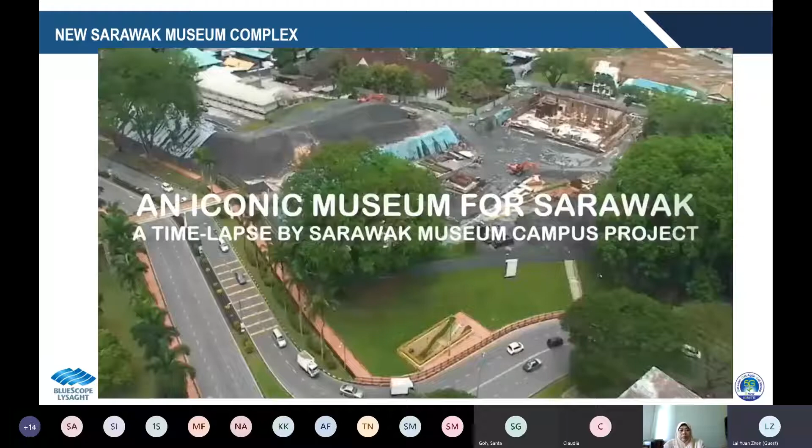Who actually allows them to film the entire construction process from the rooftop. So let's enjoy.

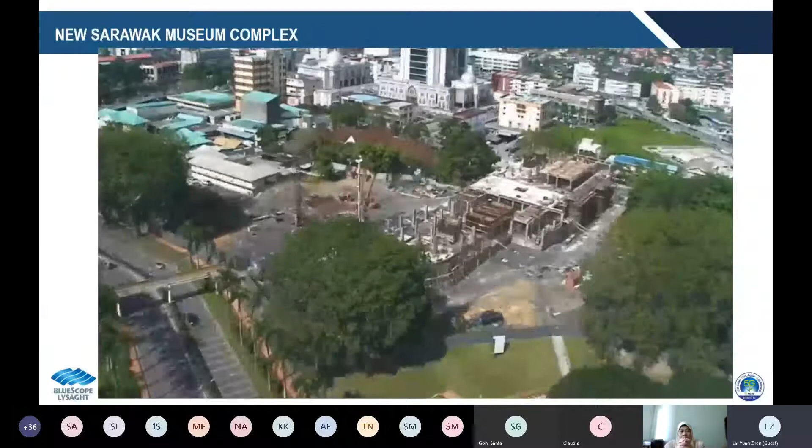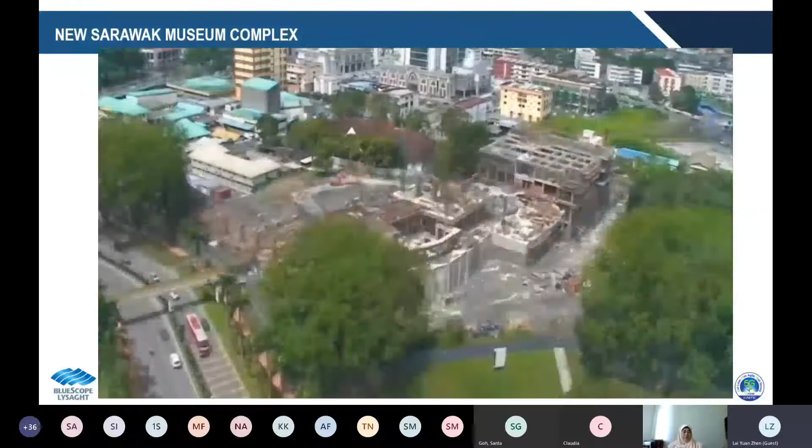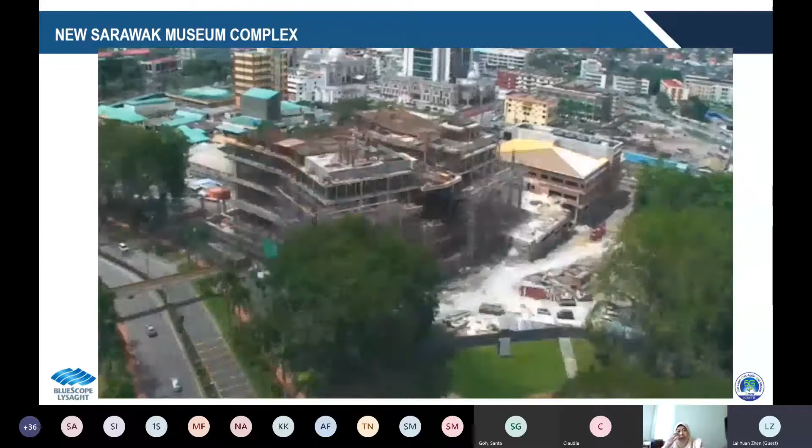Between 2015 and 2019, a unique public building was built in the city of Kuching, in the state of Sarawak, Malaysia. This time-lapse video shows the construction of the iconic Sarawak Museum complex. In 2014, under the experienced management of PPES Works Sarawak, the design and build contractor, the project received green light from the state government. Kuching-based architect AKDI signed for the design of the 30,000 square meter complex. A spacious and functional museum was designed through peer review sessions and international guidance from museum colleagues in Asia and Europe. It is built according to the latest sustainability guidelines from the Malaysia Green Building Index and is the first certified GBI museum in Malaysia.

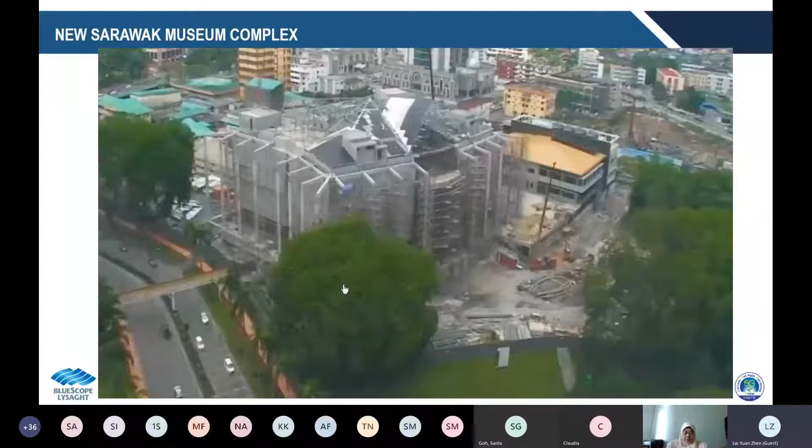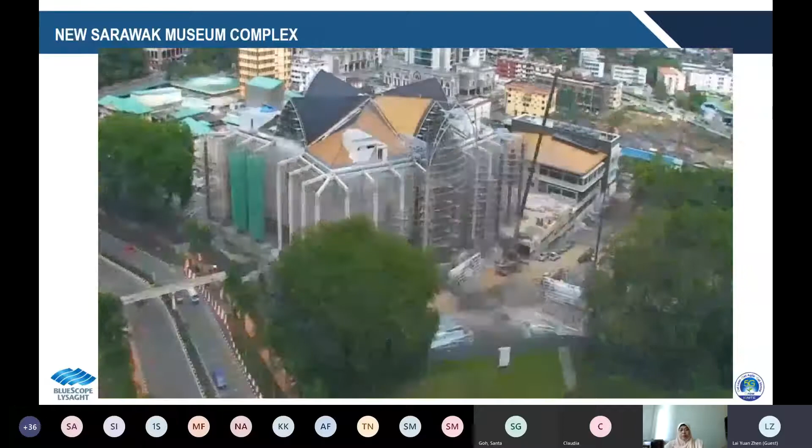Designed with all modern public facilities, it houses large collection storage facilities to keep the important museum collections safely preserved for future generations. Dedicated research laboratories support the museum's ambition towards becoming a research institute. As a center of learning, the new museum welcomes international scholars to research and document the material knowledge of Borneo's rich past, its cultures, its people, and its nature.

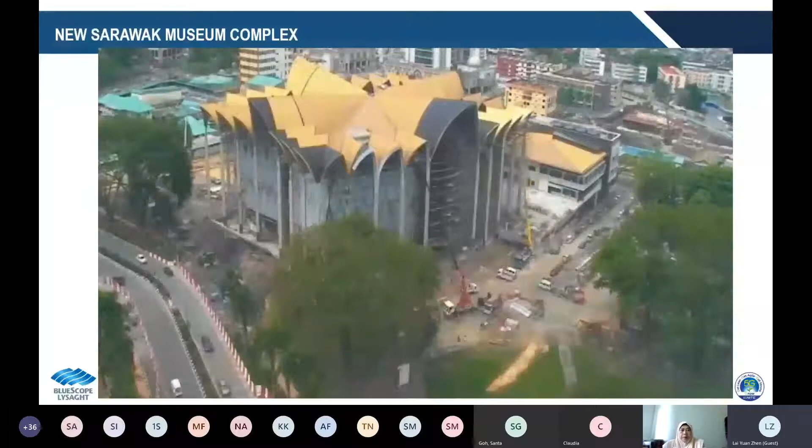The museum will be reaching out to a broad audience, young and old, scholarly or just curious, to both residents and international visitors. By end 2020, the world-class museum will open its doors to the public with a new 6,000 square meters engaging exhibition. A well-curated selection of unique artifacts and specimens will be telling multiple stories about the history and life of the people of Sarawak.

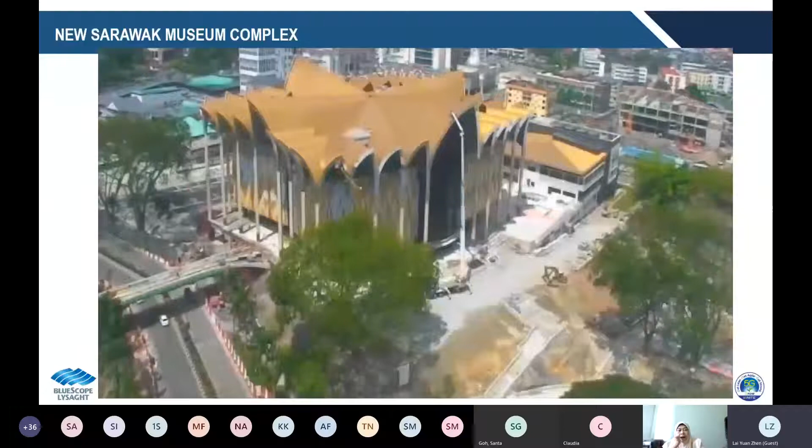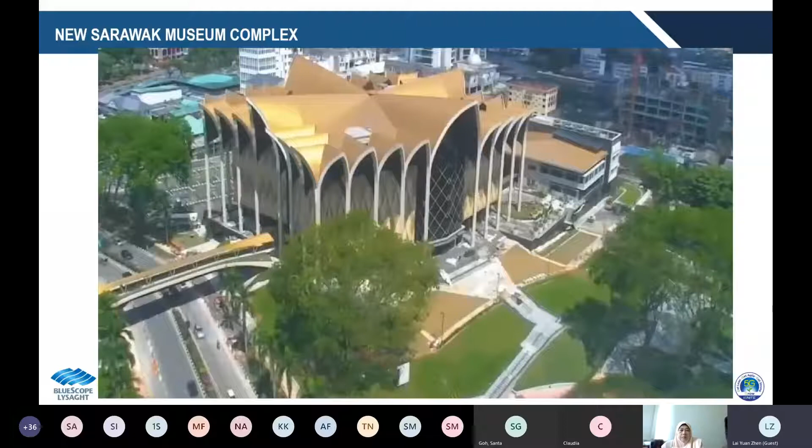The Sarawak Museum Complex is just the beginning of a new era in preserving and displaying Sarawak's rich heritage. You might say the building holds together all those precious museum objects as a rattan woven basket holds its content. We hope to see you soon and to be able to welcome you in Kuching in the iconic Sarawak Museum Complex.

Alright, so I will first start off my presentation with a brief introduction of the project's background. So this new Sarawak Museum Complex is actually a project where the client is Jabatan Museum Sarawak in collaboration with JKR Sarawak.

And the main contractor of this project is PPES Works Sarawak Sdn Bhd, whereas the design architect for this project is architect KDI. The C&S engineer for this project is EDS Consultants Sdn Bhd, whereas the quantity surveyors for these projects are JUPSA Sdn Bhd as well as PUBM Quantity Surveyor Sdn Bhd.

So this museum is set to be the largest museum in Malaysia, and it is going to be the second largest museum in Asia also. So we, NS BlueScope Lysaght Sarawak, are actually the roof contractor, awarded under package 4 in this project. Our scope of work includes the supply and installation of the roof truss and the roof coverings for the annex building and the main building.

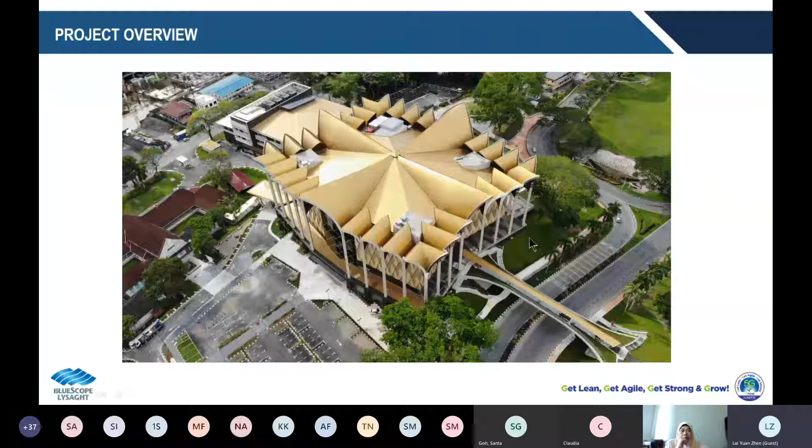Next, let's have a look at these photos. This is a photo showing the overview of the entire project. So as you can see here, I will go through a brief introduction of each individual building.

Okay, so the biggest building right in the middle of this photo is actually what we call the main building. This main building is actually a 5-story building with a combined total roof height of around 43 meters. The building next to the main building, which we call the annex building, is actually a 3-story building, right at the back of the main building.

And over the right hand side of the main building here, we have got a pedestrian bridge which we call the green connector. This green connector is actually a pedestrian link bridge that links the existing museum over here to the main building of the new Sarawak Museum Complex. We have also got the arrival canopy at this side, as well as the covered linkway, which links the existing Islamic museum over here to the new Sarawak Museum.

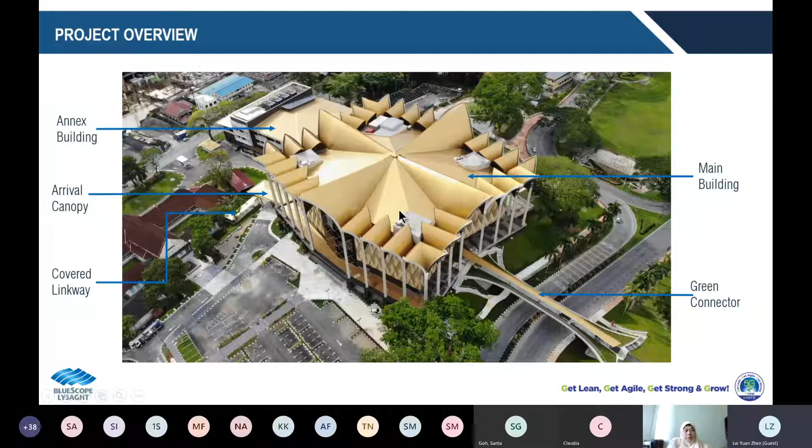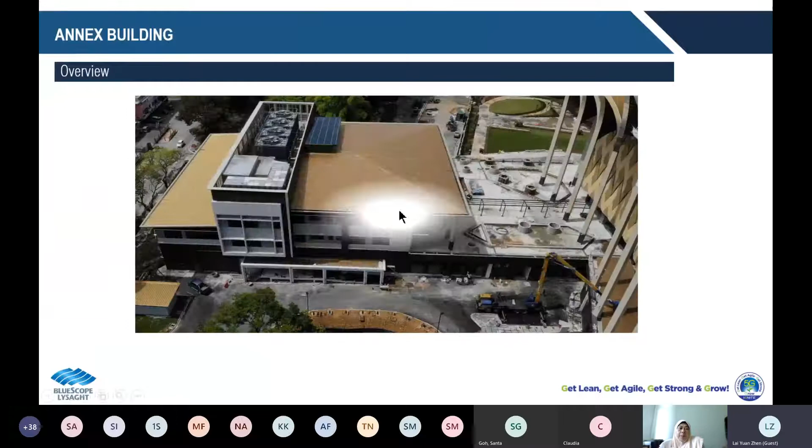So today I will mainly focus on these two buildings which are under our package, which is the main building as well as the annex building. So we will first start off with the less complicated one, the annex building. Okay, so this is a close-up photo of the annex building.

This annex building is actually a building that is connected to the main building via a platform, which at level 2 we call the level 2 platform. These annex buildings actually consist of 3 roofs.

The lowest level roof here is what we call the level 2 roof. This level 2 roof is actually a single pitch roof, and it is a pretty short roof. The roof pitch is at 3 degrees.

And we have got another roof at the back of the building, which is the level 3 roof. This level 3 roof is also a single pitch roof with a roof pitch of 3 degrees as well, but the length of the roof is much longer than that of the level 2 roof. This roof is around 14 meters.

And lastly, we have got this level 4 roof, which is actually the biggest portion of the annex building roof. This roof, in contrary to the other two, is a hip roof, but instead of falling in 4 directions, it actually falls in 3 directions with a parapet wall at one of the sides. The roof pitch for this roof is slightly higher than that of the other two roofs, at 5 degrees.

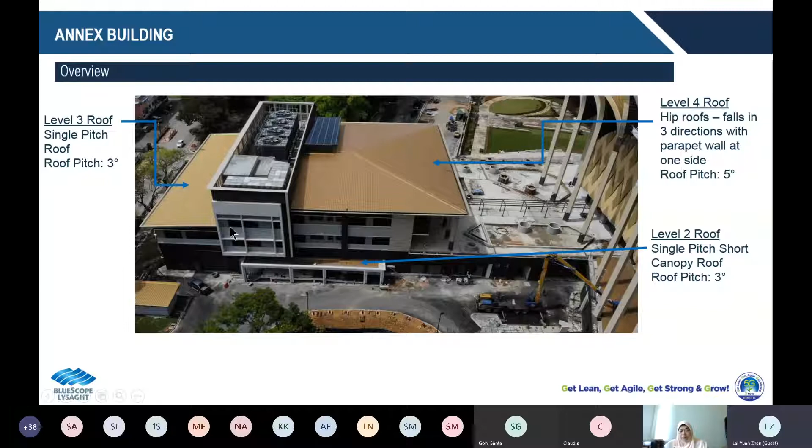Okay, next, I would like to share a bit with you on the roof specifications of the annex building itself. We'll start with the roof truss first.

Roof truss is actually the component that supports the claddings. It serves as a structural component that supports the cladding from flying off, as well as to sustain additional weight when people do maintenance on top of it. It has to be made sure that all these trusses have enough capacity to support the required weight.

So for this annex building, we are specifying our Lysaght proprietary SmarTruss system in 2 core components. This smart truss system is actually a lightweight cold form steel truss system. The good thing about this smart truss is that all the components in the trusses have a very high strength to weight ratio. Secondly, it is also termite resistant because it is steel compared to timber.

Timber is subject to termite attack, but with steel you won't have this problem. And of course, this is a lightweight cold form roof truss, and the thickness of the components is very thin. So it is relatively lightweight as compared to conventional mild steel structures. When we talk about lightweight structures, it means that it will contribute to lower foundation costs.

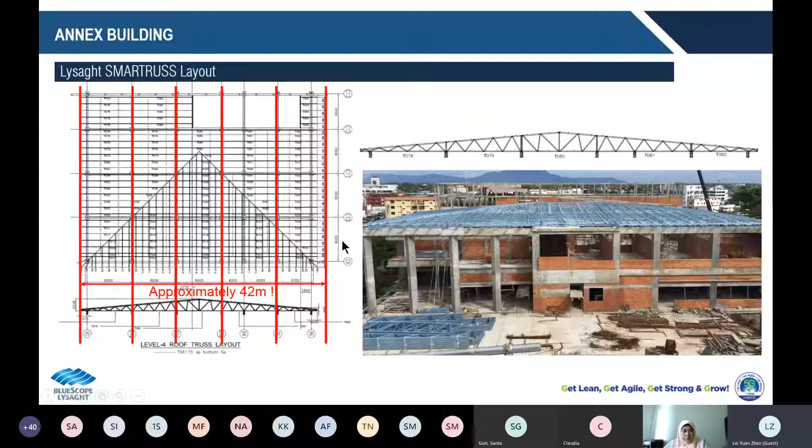So what we are doing instead of fabricating the full single truss as a continuous component, we are fabricating each truss as simply supported. We divide this truss into 5 separate simply supported trusses. By doing this, we can save a lot of time as well as labor cost when it comes to the installation. It will be much easier, require fewer workers, and there will be less safety concern during installation and erection of the trusses.

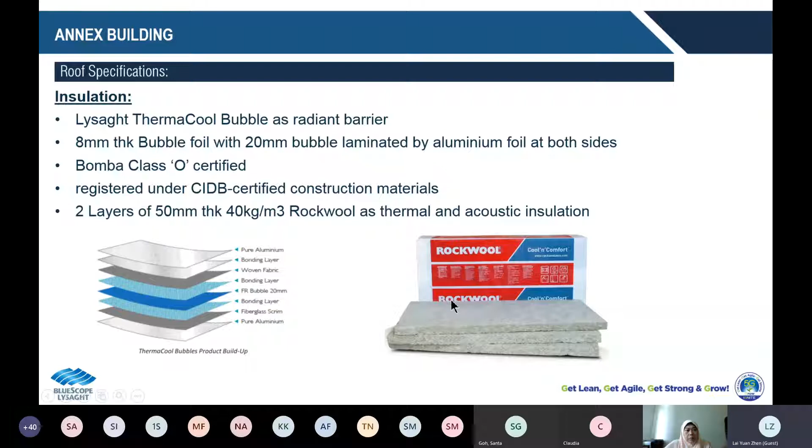Okay, now we have gone through the truss, the insulation, and the last one would be the top skin. For the top skin of the annex building, we specified our Lysaght Klip-Lok Optima profile. This Klip-Lok Optima is our concealed fixed profile with proprietary KL98 tower clip system. Since this is a concealed fixed profile, unlike pierced fastened profiles where you can see the exposed fastener on top of the roofs, this simply means there's less chance of water ingress when the fasteners fail.

For this Klip-Lok Optima profile, it has a rib height of 43mm, tall rib heights, and cover width of 980mm. So you can see this is a very wide pan and high rib profile, which is why it can go down to a minimum roof pitch of 2 degrees. Our case for the annex building is actually 3 degrees for the short roof and 5 degrees for the longer roof.

You can see that there's no problem at all using Klip-Lok Optima because it can go to a minimum pitch of 2 degrees or 3.5% slope. This is on the profile.

Next, on the material itself, what are we actually specifying for this project? The material proposed is 0.48mm BMT, 0.53mm TCT, Colorbond XPD pearlescent steel. This XPD pearlescent steel series is a very special series specifically developed for applications that demand the ultimate performance in both long-lasting colors and gloss retention. It is a very special product, kind of like a metallic version of Colorbond, with a custom formulated 70% PVDF paint system using high performance mica pigments.

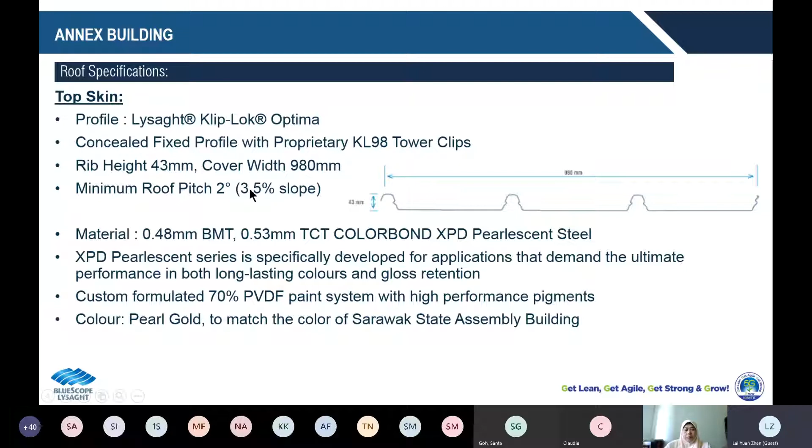Okay, so I will show you an overview of the roof build-up. But first, before that, I would like to share this with you.

But in our case it is not that simple, it is slightly different. Even though the annex building is also a single skin roof, also Klip-Lok Optima single skin, the insulation used is different — instead of a 50mm single layer, we are using 2 layers of 50mm thick rock wool. That's why we cannot do it the conventional way, because we won't be able to compress this like before, since it is already 100mm rock wool, no longer 50mm. You need to either add a Z spacer, or change your sequence of construction in order to install properly.

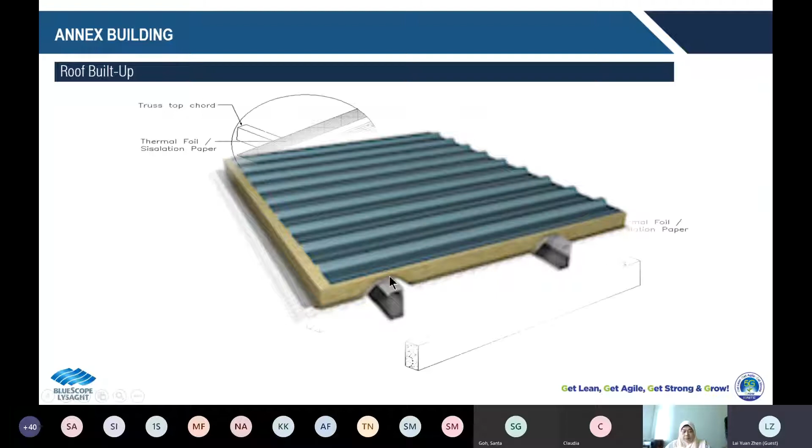As you can see from the conventional way just now, we put on the batten first, only then the foil. But in our case, we are actually putting on the foil first, the ThermaCool bubble foil, before we put on the battens. After we put on our battens, then only we put on our rock wool. So there's a slight difference in the sequence of installation as compared to the conventional single skin roof construction.

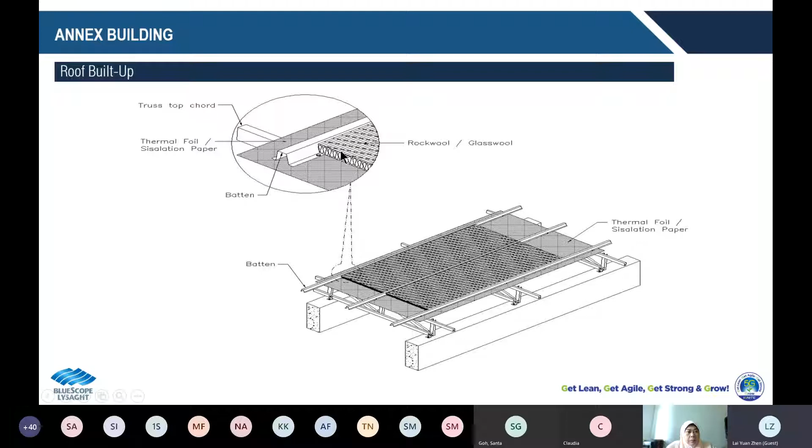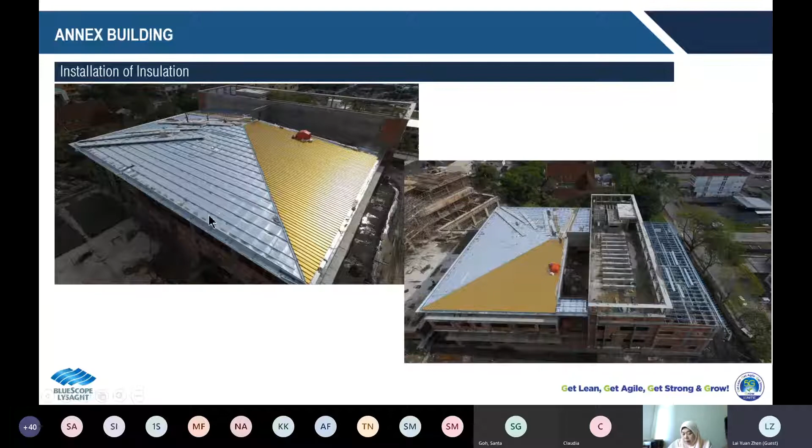So when you have an overhang outside of the roof, you will tend to have downpipes. You need downpipes to collect the water from the gutters. So when you have overhangs, the major issue is that you are going to have exposed downpipes. So what the architect is doing is a T-joint over here. You can see the gutter, there is an intersection coming into the inside here. This is where we put our downpipes inside, at the same level as the building line.

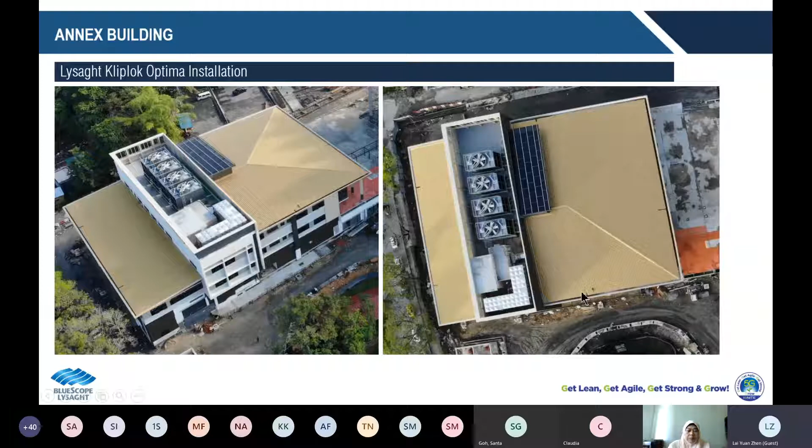Okay, so that is on the annex building. Next, I will move on to the main buildings.

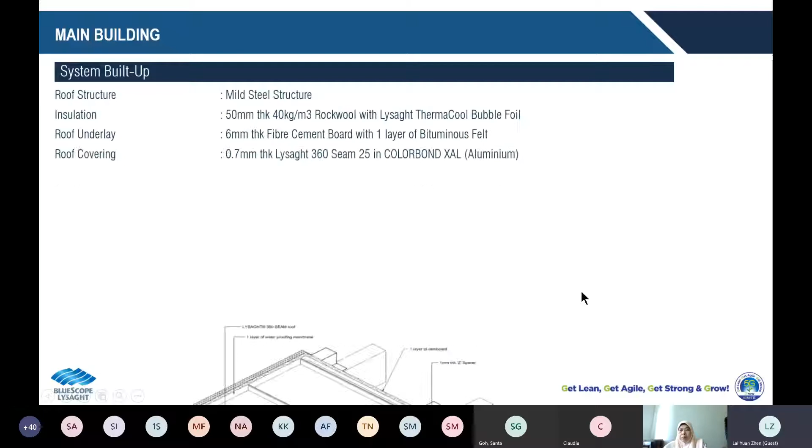So first, we'll go through the build-up of the entire system that we are proposing for the main buildings. The roof structure itself, as you can see from the overview of the Sarawak Museum, has a lot of curvy arches, big arches, small arches. So it is very obvious that in this case we will have to use mild steel structures, mild steel members, in circular hollow section in particular.

And for the insulation, instead of using 2 layers, this is only 1 layer of 50mm thick, 40kg per meter cube rock wool. And the insulation we are using is Lysaght ThermaCool bubble foil as well, the same as the annex building.

For this, because the roof covering is slightly different, we need a roof underlay. So you can see we are also using a roof underlay of 6mm thick fiber cement board. This fiber cement board, this one is the fiber cement board. Normally for a seam roof we would propose at least 9mm thick, or 12mm for a high specification one.

Why we're using 6mm thick fiber cement board in this case is because of the curvature of the roof. In order to curve the cement board to the required shape, we have to use 6mm, because we have actually performed a full scale mock-up to ensure that this 6mm can actually form the curve required by the architects.

After the cement board, we have 1 layer of 1.5mm thick bituminous felt, the waterproofing membrane, on top of it. Then after all these are up, we have our roof covering of 0.7mm thick Lysaght 360 Seam 25 in Colorbond XAL. This Colorbond XAL is actually aluminium.

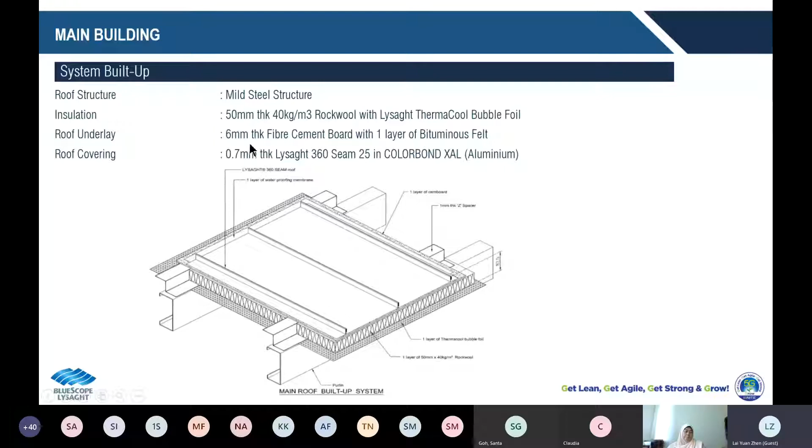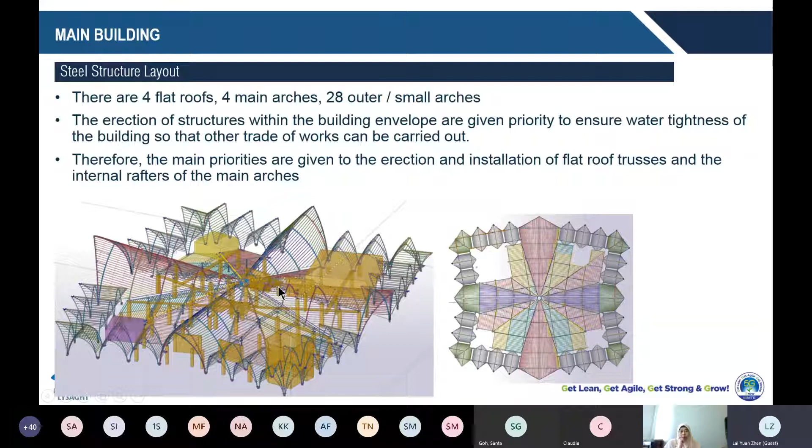This ring truss over here. But of course, as you can see in this perspective, the ring truss is actually suspended. You cannot have a truss just hanging in the air without any support. That is why we need to build our temporary supports first.

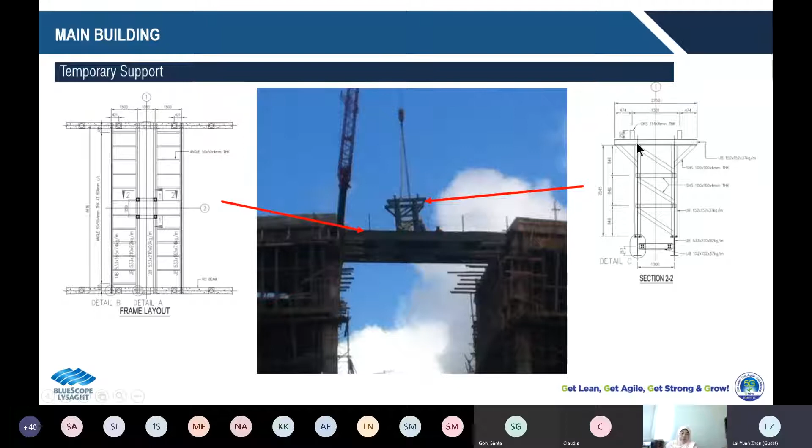So after all these are out, then we can put on our ring truss. This is how it's going to look like, how the ring truss is going to be established. You can see that before we put on this ring truss, we need to have this temporary support and this platform out first. If not, there won't be any platform for the ring truss to sit on.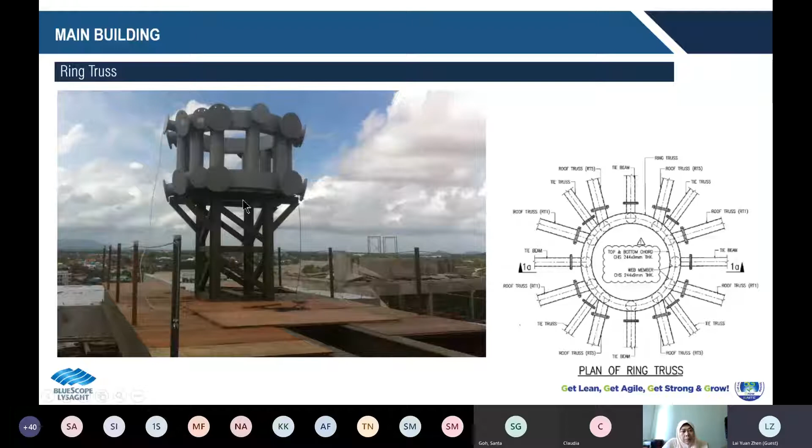After we put on the ring truss, we can start installing the trusses for the flat roofs. There are 3 main trusses, with one connecting to the corners of the RC roof, and the other 2 connecting to the edge of the main arches on that side.

After all 3 main trusses are erected and installed, we add the transverse trusses, which provide lateral stability to the main trusses. After installing the flat roofs, we proceed with the installation of the main arches, which are erected on the roof itself.

The curved rafters of the main arches are fabricated and curved in the fabrication yard. We curve all these individual components and members at our fabrication yard instead of on site, because the area allocated for this site is not very big, so it would be a problem to fabricate everything there.

So we make sure all these rafters are done properly at our fabrication yard, requiring very extensive and comprehensive detailing and curving precision to ensure all erected curved rafters are on the same curved planes. These radiuses are all different, getting smaller, and even a single curve like this has two different radiuses already. That's why we need to be very careful with the detailing and precision of how we curve the rafters.

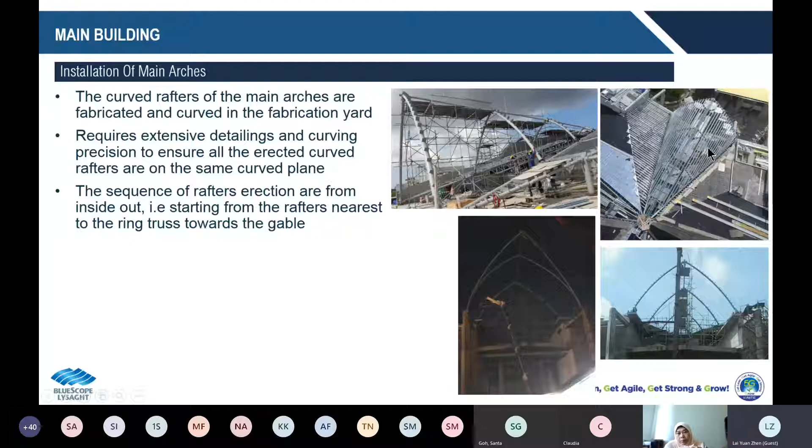After installing the main arches and flat roofs, next I'd like to share the outer arches, the small arches. The size of the outer arches and main arches differ quite significantly. The components of the outer arches, such as the curved rafters and the tie beams,

all these individual loose components are also fabricated in the fabrication yard, just like the main arches. But the assembly of the components is actually done at the site on the ground. As I mentioned, the main arches are assembled and erected on the rooftop because they're too big, but this one is much smaller.

So we can do the fabrication, including the purlins, tie beams, and rafters, on the ground at ground level. The setting out of the base plate position is also done on the ground, using mild steel members to fix the bases in position.

We take the measurement at the rooftop and compare it with the architectural or structural drawings to make sure it tallies. If it differs, but not by too much, we do the setting out on the ground accordingly. This helps because when we do it on the ground, the process is much smoother, and there are fewer safety concerns.

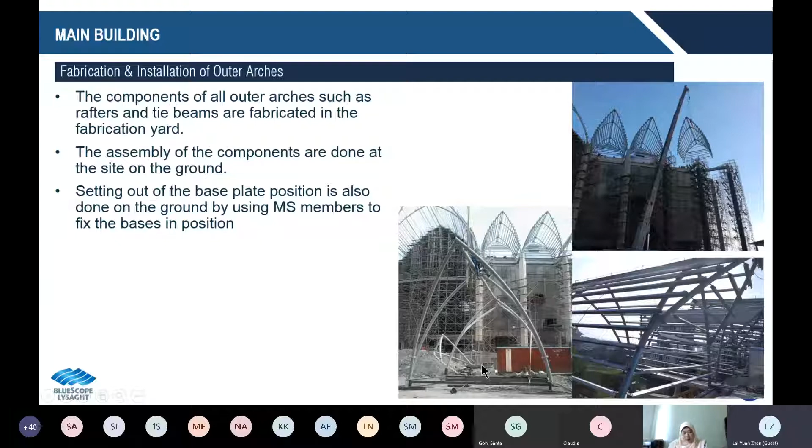Only after we have erected and assembled everything on the ground do we lift the entire outer arch up to the roof level and install it. That covers the roof structures. Next, I'd like to share with you the installation of the roofing system.

We lay the bubble foil across in the same direction as the roof, and then we put on our Z spacer. This Z spacer actually serves as a gap filler to accommodate the 50mm rock wool. After we have got this rock wool up, then we can start laying our cemboard. This cemboard will be followed by a bituminous felt, and then the seam roof. So I will show you some construction photos for your ease of understanding.

The first one would be the installation of, after we put on the purlin, we need to put on the bubble foil and the Z spacer first. So this is how it looks like. Our Lysaght Thermacool bubble foil are to be laid in the direction perpendicular to the purlins. So purlins is in this horizontal direction, and our foil is laying in the perpendicular direction to the purlins. Unlike ANNEX building where it's parallel to the direction of the purlins, this one is perpendicular to the direction of the purlins because we have got Z spacer over here. Of course, some self-drilling screws need to be fastened to fix the bubble foil in position prior to the installation of the Z spacer.

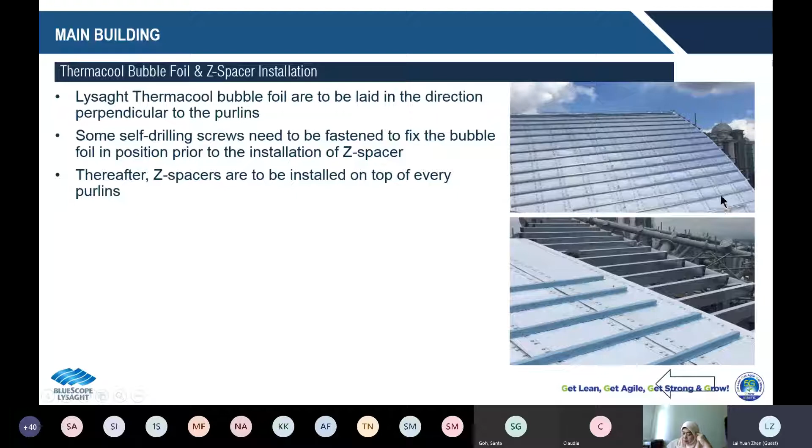Because before you put on this Z spacer, when you lay the rock wool all the way down the roof, you need to temporarily fix the Thermacool bubble foil in position first, in order to prevent, since this is a steep roof, the foil from slipping and sagging. So you need to fix them in position first, and only after you have secured it in place can you put on your Z spacer. The Z spacer is actually installed in the direction parallel to the purlins. So wherever you have your purlins, you will have your Z spacers - you cannot skip your Z spacer in this case. So if your purlins are every 600mm, then you need your Z spacer at every 600mm center to center.

Okay, after we put on the Z spacer, then we can start laying our rock wool. So this is the rock wool. The rock wool is actually laid in between the Z spacers to fill up the gap. The height of the Z spacer is 50mm thick, so it is exactly the same height as the rock wool.

This rock wool normally comes in two forms, one in slab form, one in blanket form. Blanket form is the more commonly seen one, where it is in roll form, but this slab form is actually piece by piece. The dimension of this slab rock wool is 2 feet times 4 feet times 50mm thick. So that is one of the reasons why we are actually fixing our purlin spacing at 600mm also, because we want to make sure it fits perfectly to minimize the trimming and cutting of the rock wool.

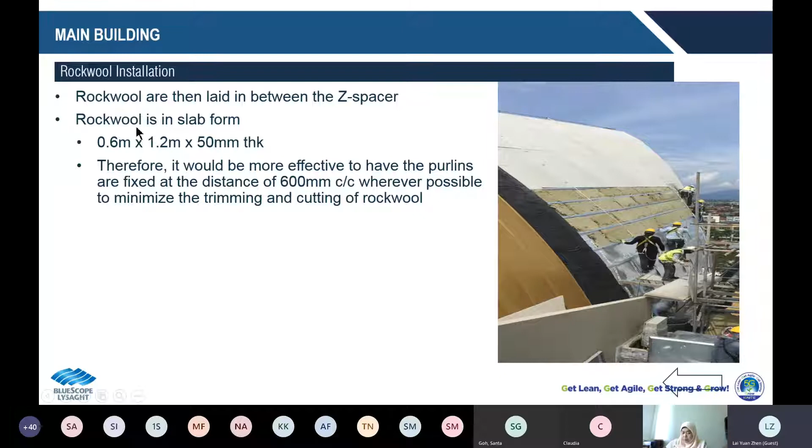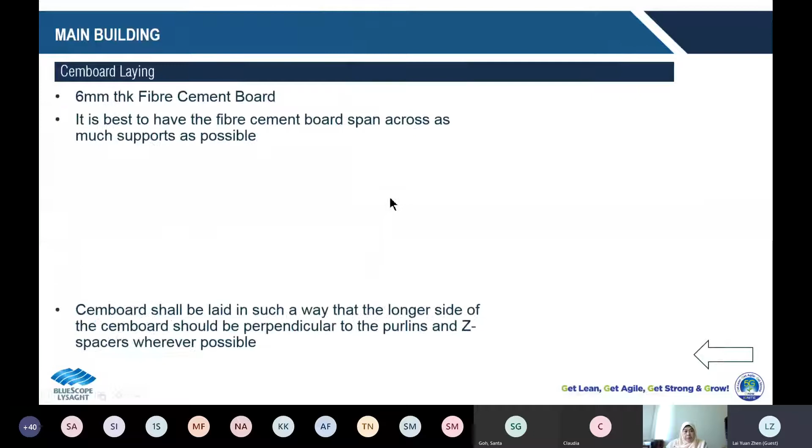Okay, after we have laid the rock wool, then we can start laying our fiber cement board. So this is how it looks like once the fiber cement board is installed. As I mentioned, the thickness we are proposing for this fiber cement board is 6mm thick due to the curvature of the roof. Of course, it is also best to have the fiber cement board span across as much support as possible, meaning the cemboard shall be laid such that its longer side is perpendicular to the purlins and Z spacers wherever possible.

So for the screws that we use to secure the cemboard, it has to be a countersunk screw, which is actually a flat screw. Normally the one used for the trusses is a hexagon head screw, where there is a protrusion of the screw head. We can't use this because if we did, we would have problems installing the top skin later - you'd have a screw head protruding out of the top skin, which wouldn't look good.

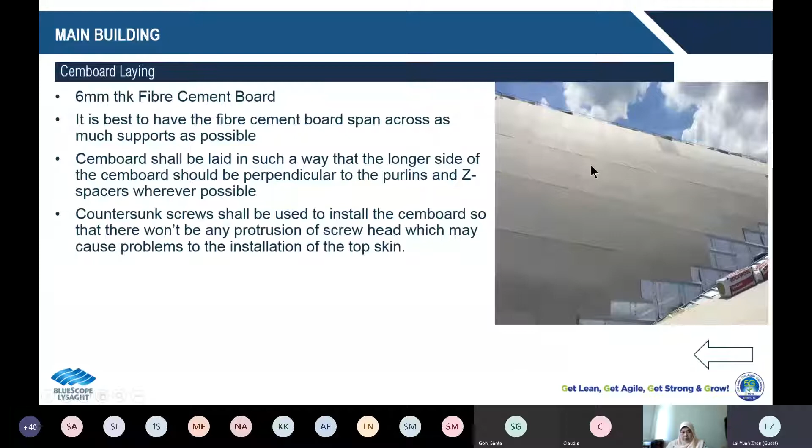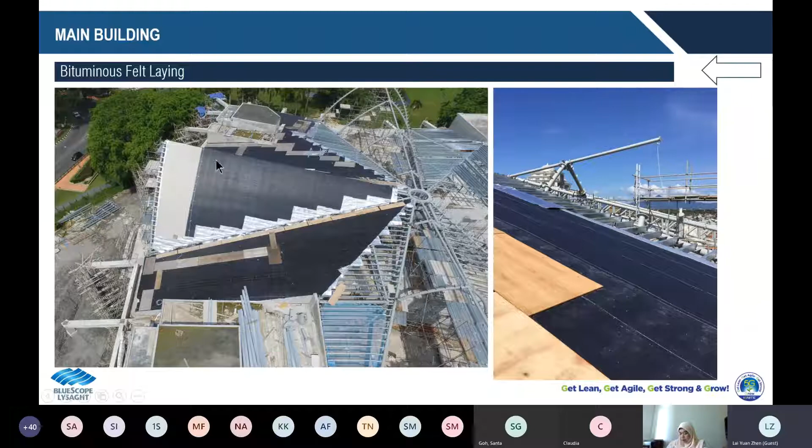After all the bituminous felt is laid, we can start laying our top skin - the most important one, our Lysaght 360 Seam 25. Just to share with you, the cover width of our 360 Seam 25 is actually 521 mm wide - this is what we call the cover width. So this is a very wide profile. It is also a concealed fixed profile, like Klip-Lok, it is also a clip system, so you won't see a lot of fasteners on top in the middle of the roofs.

The reason we are using Seam 25 - some of you may wonder why we use Seam for the main roof and Klip-Lok for the annex building, why not use Klip-Lok for all of them - is that this roof is not as simple as the annex building, which is just a flat roof. This main building is very complex; the shape of this building is very complex. There are a lot of arches, so we need a profile that has very high flexibility and high formability. That is where the 360 Seam 25 comes in, because it can form a lot of different shapes.

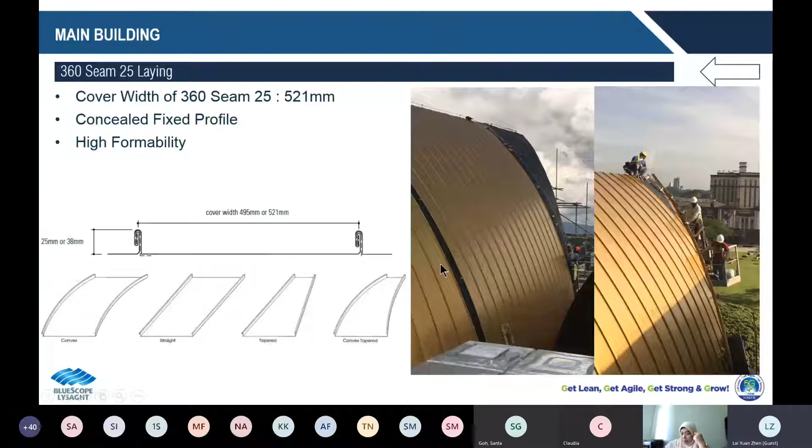For Clip Optima, you can only roll this kind of straight profile, meaning the cover width of the Clip Optima is 980 mm, consistent throughout - there's no way you can taper it, and no way you can curve it using a machine. So you won't be able to do this with Clip Optima, but you can do all this with our 360 Seam. That is why we are proposing this profile for the main building, because of the complex shape.

Okay, so that is on the roof system build up.

Next, I would like to share a bit with you on the roof laying sequence. As you can see, the pattern of the installation sequence is that we'll install the flat roof first. This one is the first we install, then we install another adjacent flat roof next to it, and the third one will be the main arches over there.

The reason we're installing in this pattern is that we need to get the gutter installed first before we are able to install the top skin. If we install all the flat roofs without any main arches installed, we won't be able to install the gutter, and without the gutter installed, we won't be able to install the top skin. So if we installed all flat roofs, we would end up not installing any of the roofing sheet at the end of the day. That is why we do it this way: two flat roofs and one arch in the middle.

Once this arch is up, we do this part followed by E, then F followed by G, and only then do we move on to the small arches, the outer arches at the outside of the building, because these are less critical - since they are outside the buildings, they won't have too much water tightness concern.

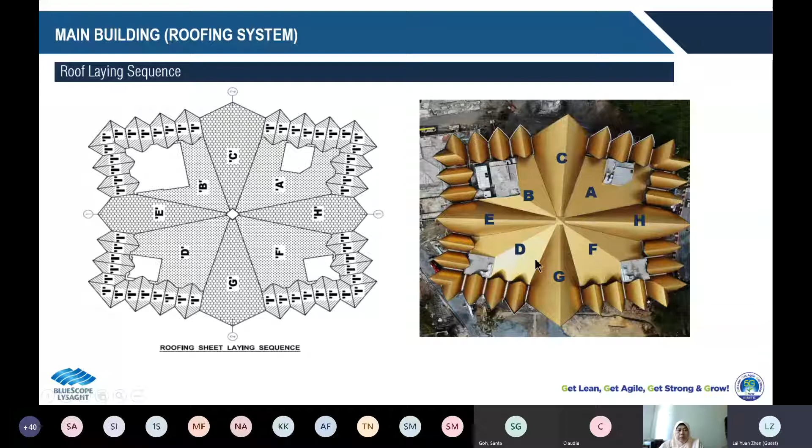So I mentioned about the gutters just now. I think one of the key things we need to look at in detail for these particular buildings is actually the gutters, because water drainage is very important. We need to identify where the water flows to ensure there won't be any water overflow or leakage problems at the end of the day.

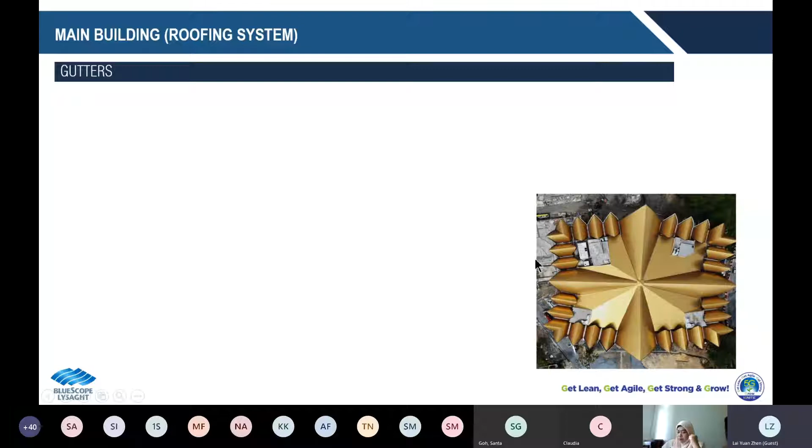So just to recap, this is the roof plan of the main building, the main roof. If you look at this, there are a lot of gutters inside there. I mainly categorize them into four types. I will start off with the first type, the smallest type of gutter first.

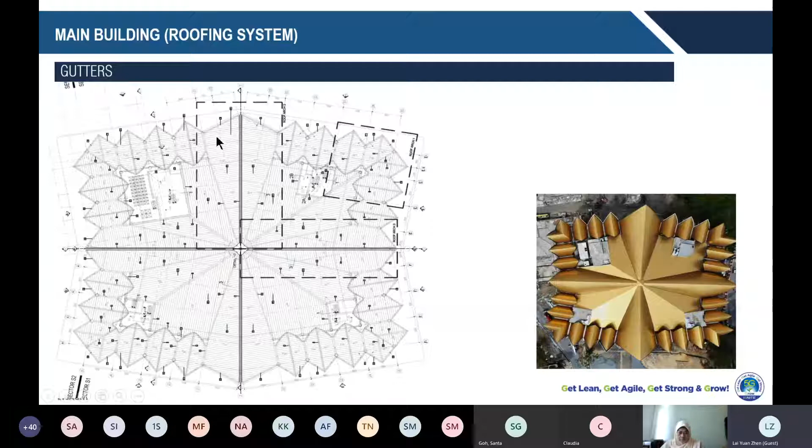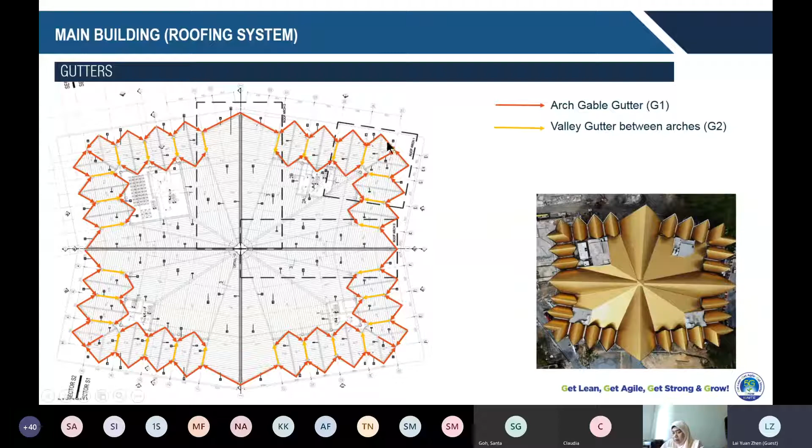When we use aluminum gutter at the gable gutter, because the gutter is at a gradient, we can just lap it. As long as we lap it correctly, the chance of water going in is less likely. In this case the gradient is very gentle, so we have to make sure all these joints are properly well taken care of. That is why we are using stainless steel, because all these joints can be welded, and the welded joint will be definitely much less susceptible to compromise over time.

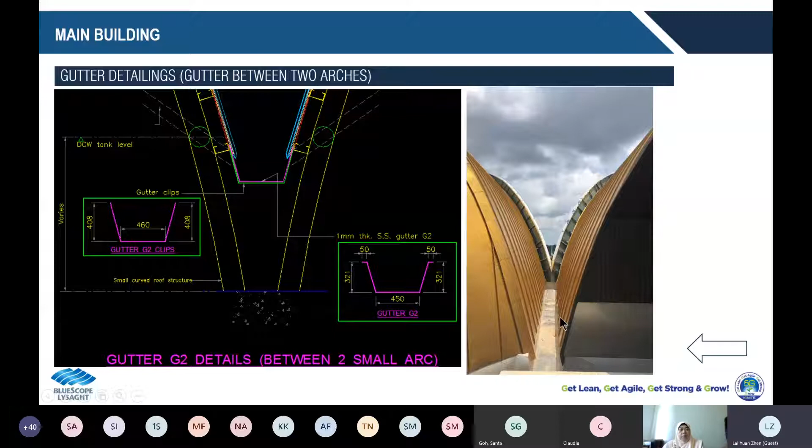Next is G3, the valley gutter between the arch and the flat roof. Just now we talked about the valley gutter between the two curved arches. This one, G3, is the valley gutter between the main arches and the flat roof, shown as the blue lines over here. These are how the valley gutters look like.

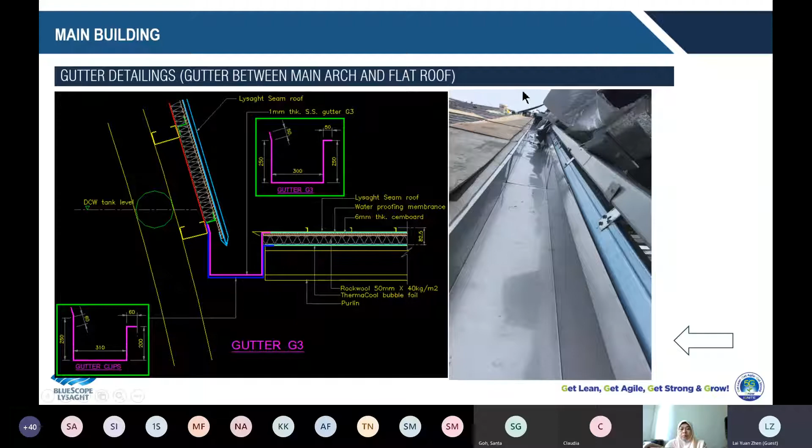This valley gutter's specifications and materials are also stainless steel, 1 mm thick, and the mode of construction is more or less the same as G2. It also uses a gutter bracket hooked to the purlins, at every 600 mm center to center, followed by our stainless steel gutters all the way up to the apex of the roofs.

Last but not least, the mother of all gutters, the main gutter, G4. This is the biggest gutter of all. It is a gigantic gutter that collects all the water from G1, G2, and G3, and all the roofs over here. It has to be very big to ensure it has enough capacity to collect that much water without overflowing. This is how the main gutter looks like.

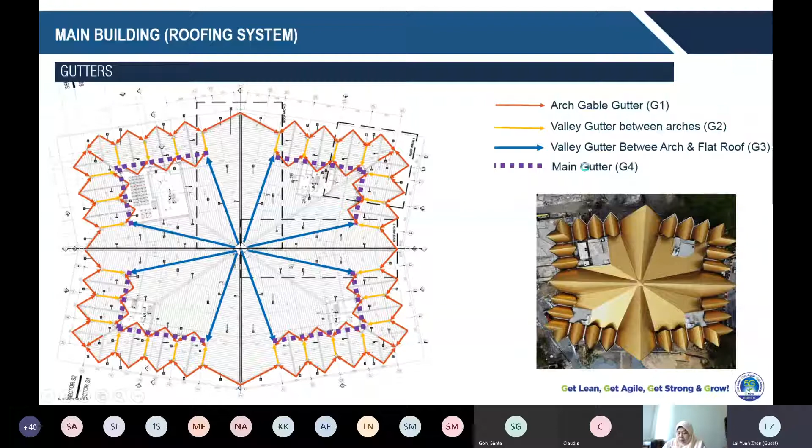This gutter is so big that we have to specifically design supports to actually support it. So we are using this blue colored material, which is actually the same component as our smart truss, our TRUECORE material, to form a kind of truss as a support for this gutter.

We also have to put on one layer of cement board, 6mm thick, as the gutter substrate, to minimize the chances of any ponding issue.

This gutter is so big, it's 1.4 to 1.5 meters tall. You can see there's even a small ladder, because once you get into the gutter, you will have a very hard time climbing out since it's such a huge gutter.

It's so big that we have to divide this gutter into 3 segments, because the raw material, when it comes in sheet form, is only 2.44 by 1.22 meters, 4 feet by 8 feet. This is way exceeding that figure already, so we need to divide it into multiple pieces, and all of this has to be properly welded to make sure they are 100% watertight.

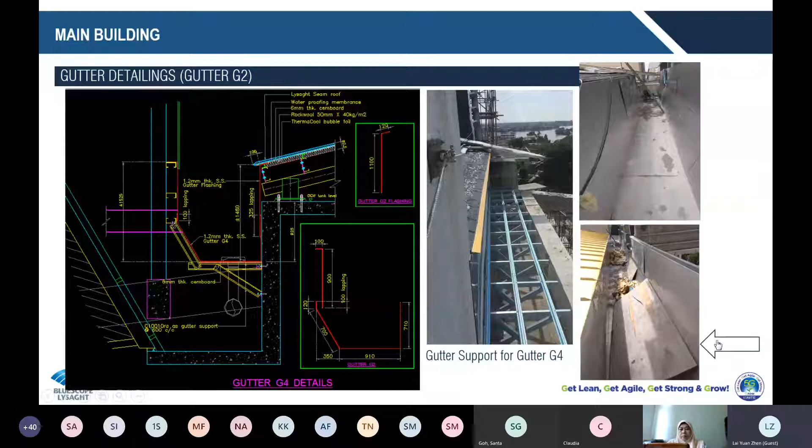Okay, so this is on the gutters.

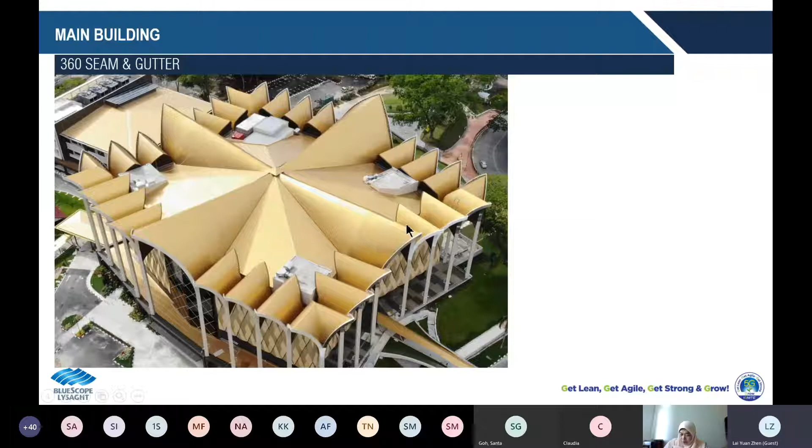Now that I've explained all the types of gutters and their functions, next I'd like to share the detailing on the intersection of these gutters. I mentioned G1, G2, G3, G4, and eventually all these gutters connect, so special attention needs to be paid when doing the detailing, to make sure they connect properly and there won't be any problems, because we're talking about a very big catchment, a huge chunk of water being collected at the end of the day.

So this is how the intersection of the gutters looks like. This is G1, the eave gutter, the gable gutter. All the water from here, together with all the roof sheet, will fall down into gutter G2, the gutter between the valleys, and the water inside G2 will eventually fall into the mother of all gutters, the main gutter G4. At the same time, G3, between the main arches and the flat roof, will also fall into G4. So this is how the connection looks like.

If you notice closely, even though this height is 1.48 meters, the height of G4 is very huge, but the effective depth of G4 is at this level only, because it's governed by this level of G2. This level will govern the effective depth of G4, because once the water in G4 exceeds the soffit of G2, it will tend to backflow and overflow. So during the construction of the steel, we have to make sure this level has already been taken into account.

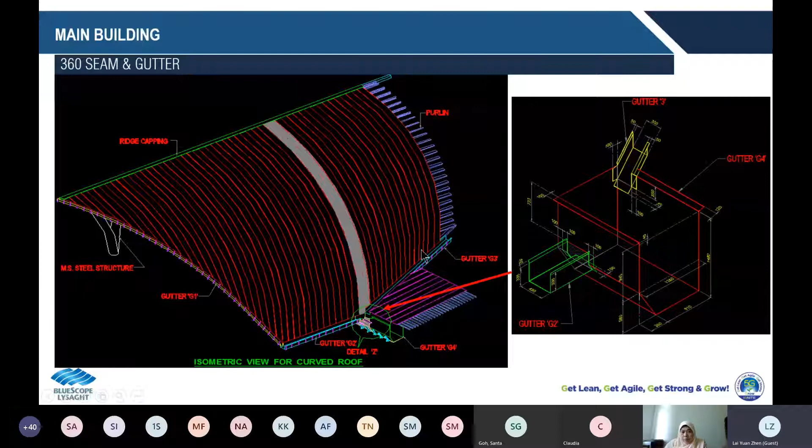Next, on the construction, I'd like to share the manufacturing process of our 360 Seam. Not only is it a very complex roof, it is also a very long roof. As you can see from this plan, this roof sheet has already been lifted up to the rooftop, and you can see it's very long, around 32 meters. That's a length you won't be able to find any lorry or trailer to carry to the site.

So definitely, even if we are able to roll this piece of roof in the factory, we won't be able to transport it to the site, because I don't think there is such a trailer or mode of transportation that allows this kind of length of roof to be on the road. So what we are actually doing is that we are mobilizing our whole 360 Seam machine to the site.

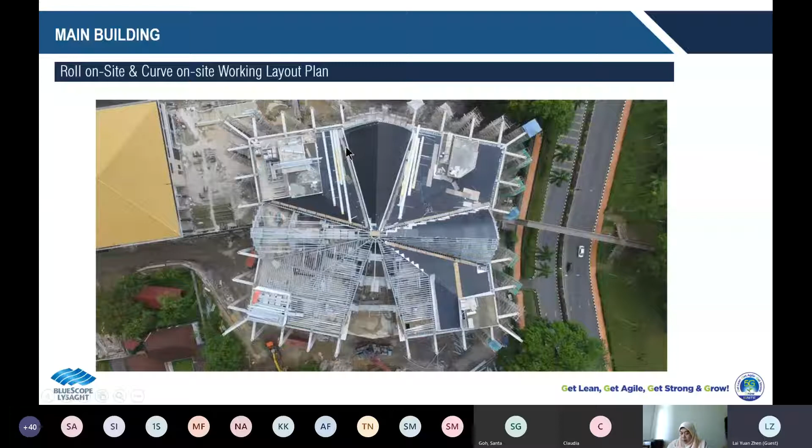So that is why we are actually mobilizing our entire machine to the site and roll it over here at the level 2 area. If you recall, this is exactly the area where we were doing the fabrication of our lightweight truss for this annex building just now.

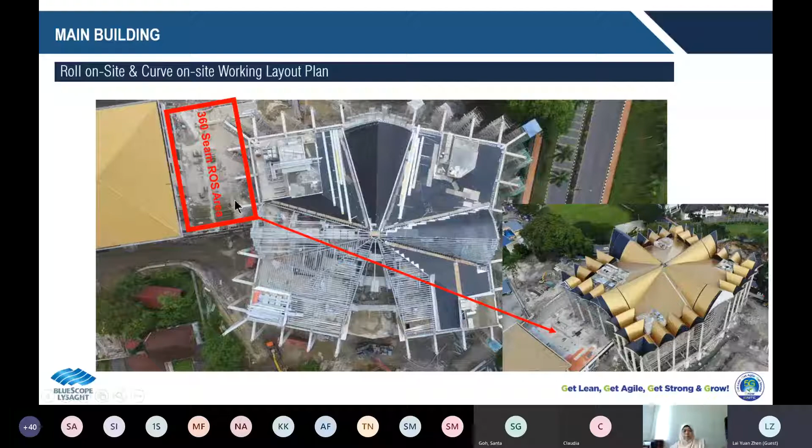So this is like a very useful place for us to do all the manufacturing over here. We are roll forming all these long length sheets at this level. After we have rolled out all this, we'll lift it all the way up to the level over here.

And of course, the lifting process needs to be very careful. So I will show you some video on how the lifting process is done. This is how it looks like. When you lift your seam roof, you cannot just simply lift it like that. You cannot just put a sling on the roof and lift it. It's going to eventually break because it is very long.

So what you need is this spreader bar. You see the triangular truss over here - this is what we call the spreader beam or spreader bar that can provide strength to the roof. So what you need for lifting this kind of long length roof is this spreader bar.

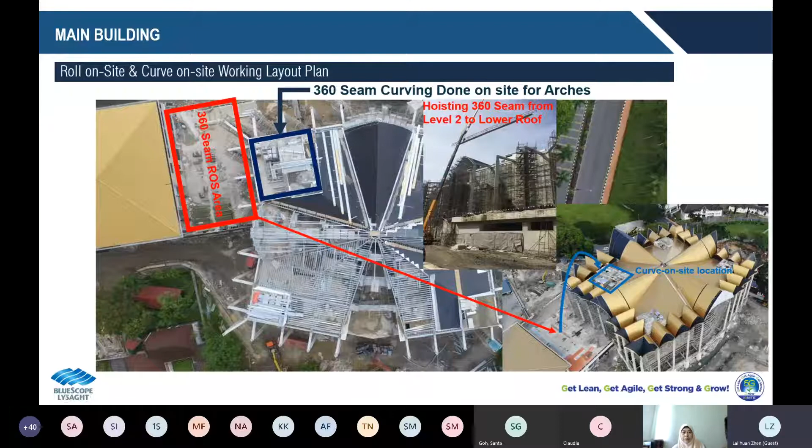You can see that this is a very tedious process, because lifting this piece alone will take probably 15 to 30 minutes just to lift it up to the top. So it is a very time consuming process to actually lift the whole thing up to the roof.

After we lift it up to the roof, then we curve it, because the roof that we roll out is straight, not curved yet. So we need a special curving machine to curve the roof. After we lift the straight roof rolled at this area, we'll lift it out to this area, and then do the curving on the rooftop.

So our curver will lift this curving machine, which is much lighter compared to our 360 seam roll forming machine. We'll lift this entire curving machine up to the rooftop and curve the roof there, then mobilize it by manpower to the respective area which requires such curved roof.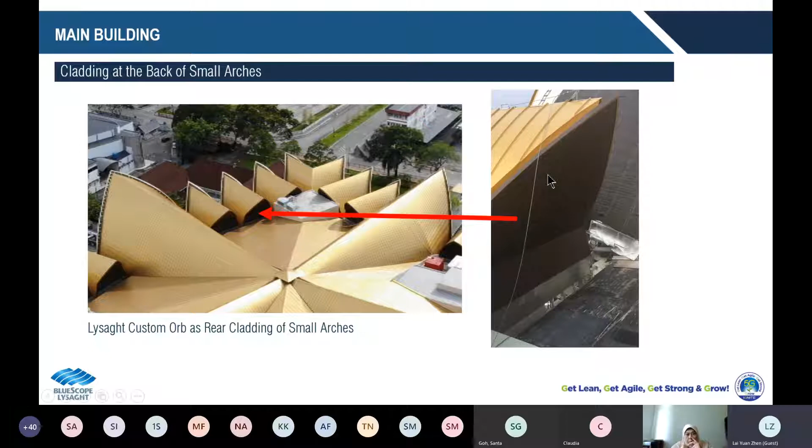Okay, so last but not least, the safety. I would like to share with you some of our safety innovations or initiatives that we have taken in these projects.

In BlueScope, safety always comes on top of everything, and there shall never be any compromise when it comes to working safely. So even though we face a lot of time challenges and need to complete in time, we need to ensure everything is done in a timely and efficient manner. But when it comes to safety, we put all that below safety. Safety always needs to be on top of everything, because we cannot afford to risk any of our installers' or workers' lives, especially for such complex buildings.

Therefore, a lot of risk assessments need to be carried out prior to the kickoff of the project to ensure that all potential safety issues and hazards are addressed. And the key challenge that we face in project execution is to establish safe access and platforms, especially for the steep and curvy arches.

That is why we need to always stay innovative to ensure safe, practical, and out-of-the-box solutions. In this case, the main challenges we are facing when installing the roof is that...

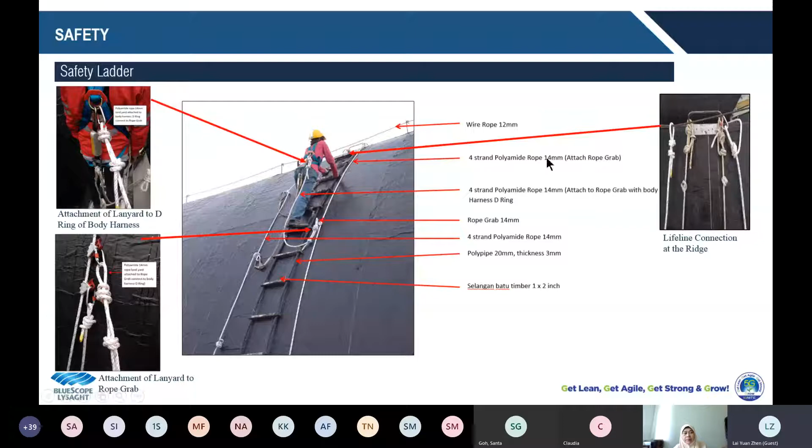So this is how the whole thing works - I will share with you how these things work. For going up, I will show you what the going up process looks like. This is how it looks - you can see they release one of the lanyards when going up, and they hook it, and they have to pull this and put it on again.

As you can see, at the same time, this rope grab is also sliding up. It doesn't require anything to be done to it at the moment when it is going up.

When it is coming down, it is slightly different, because you will have to release this rope grab. When it goes up, it can just follow, but when it comes down, you will have to release it - it is actually a safety function to prevent any potential unexpected fall.

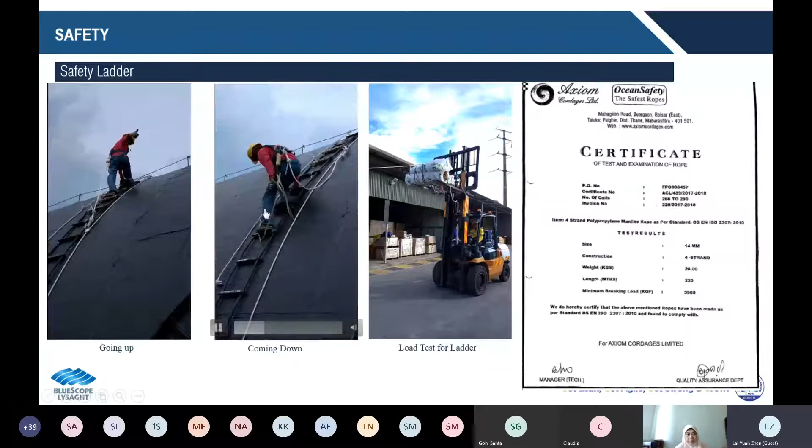As you can see, when the installer is coming down, they are putting off this. When they are disengaging the lanyard, they will have to go all the way back up and release this rope grab.

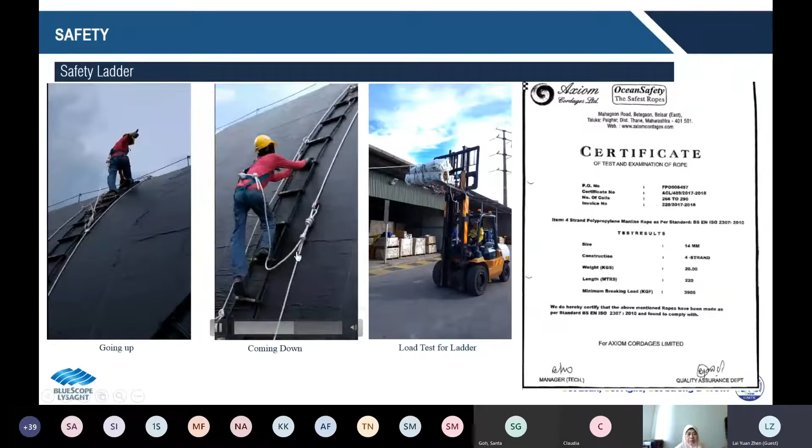For all these ladders, apart from getting all the certifications required for the components used for these safety systems, we also need to ensure that the ladders we build are actually capable of sustaining the fall impact of the workers. That is why we do a real scale, full scale load test for the ladder itself. So this is the video of our test.

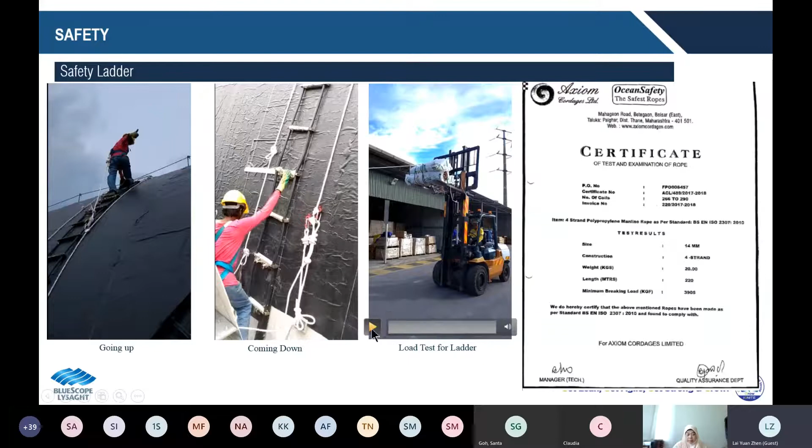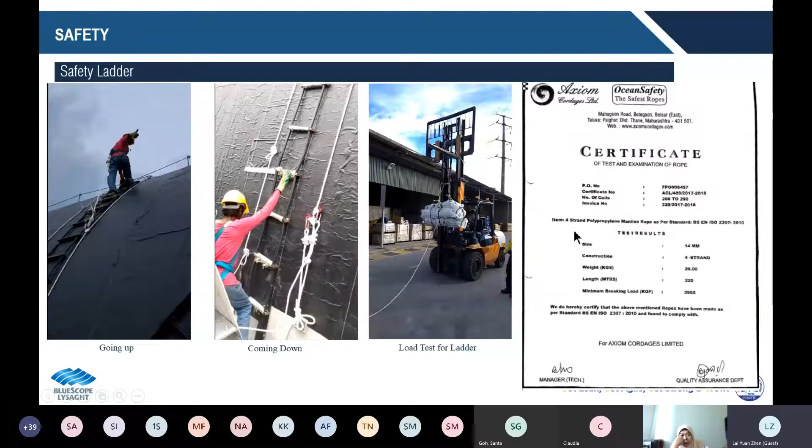This is our waterproofing membrane. One roll of this waterproofing membrane is around 40 kg, and we are using 4 of them, totaling around 160 kilos, which is more or less equivalent to the weight of two workers working on top of the roof. So you can see it is able to sustain the weight of at least two workers. We actually ran simulations to ensure the ladder has enough capacity to cater for the weight of the workers working on top of it.

Okay, the next one is about the 2 rows of lifeline connected to the ridge. The first thing we need to establish before all this is the ridge support, this wire rope. So I would like to share with you the sequence on how this is installed.

This rod needs to be a threaded rod because we are not welding it as a single entity. The reason is we will have to remove this later, or else it won't look nice. If you imagine all this threaded rod used as a permanent feature of the entire museum finishing, I don't think people will like it, it won't be aesthetically pleasing. So that is why we use a threaded rod to make sure we can actually remove it at the end of the day.

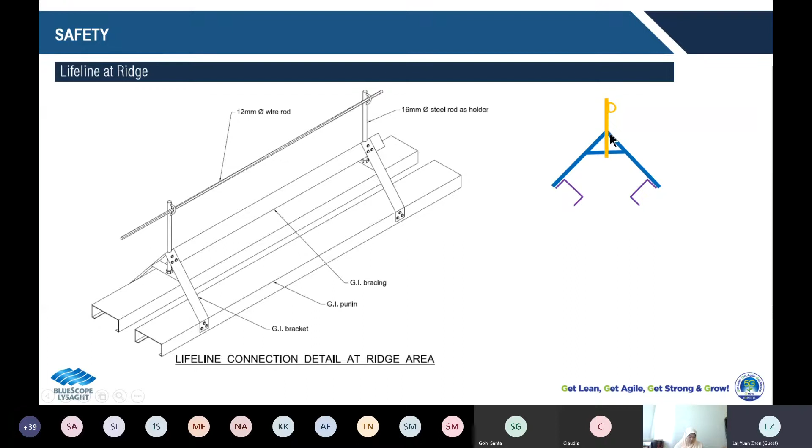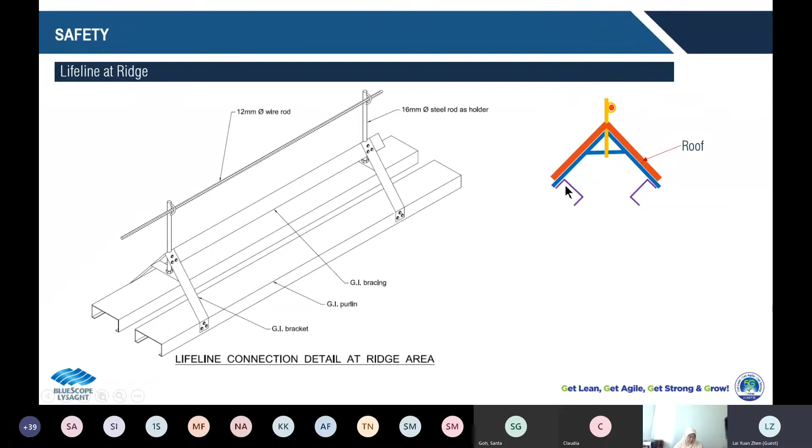So after we put on the threaded rod, we can pull through this 12 mm wire rod across it. After we've got this established, we can put on our roofing. So this is what it looks like after we put on the roofing and the threaded rod, and these are the 12 mm diameter wire rod, to serve as an anchoring point for the lifeline.

After the establishment of all this, we can start installing the ladders and the rest of the stuff to begin installation of the roofing. After the installation of the roof is done, all these seam roofs, after they've been installed, we can remove this threaded rod.

This is what I mentioned just now, there's a thread over here, you can just push it just like a screw and remove it. After we've removed it, we can cover it with our ridge capping, so you won't have any trace of screws or puncture on top of the roof at the end of the day.

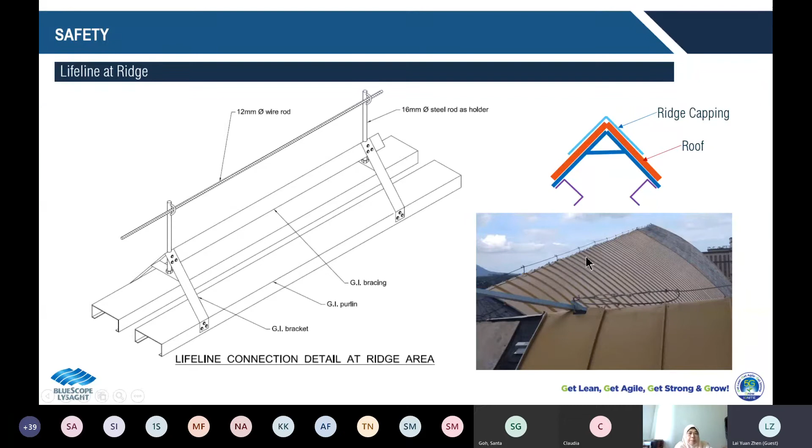So this is how it looks like after the installation of the ridge capping, you won't be able to see all the threaded rods, you'll be able to see this. Now, some of you may wonder, after I remove this threaded rod, how am I going to climb to the top to remove it, and how do I install the ridge capping?

So this is what we are doing. We are introducing these special steel ladders on top with a special clamp that clamps to the ribs of the seam roof. Once we've got all the seam roof covered, we start installing this ladder with a clamp, which is clamped to the ribs of the roof, and then we access the rooftop using these custom-made ladders to remove the threaded rods as well as install the ridge capping.